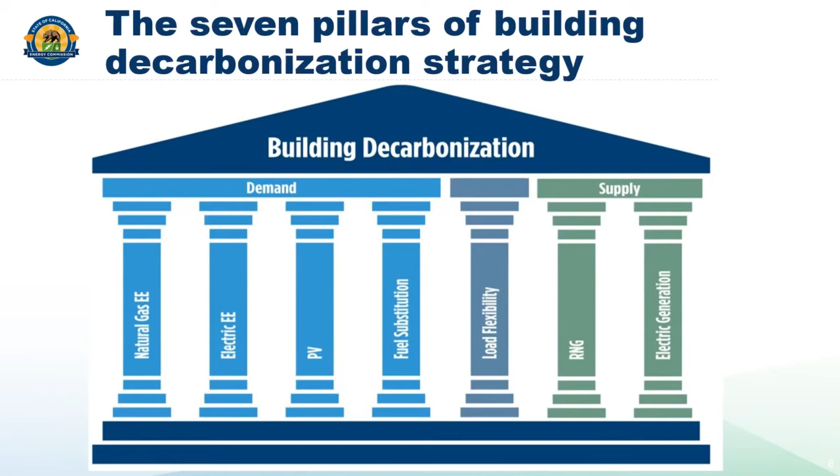Then we have the pillar of load flexibility, which a lot of people will talk about as reducing GHG emissions, and it certainly can. But we actually are starting to think that this might play a much more important role in allowing electrification of a green grid. And these are all things we wouldn't have known without doing the work of the assessment. So you'll see hopefully why we might say some of those things.

So if I'm looking here at this chart, we want to reduce the emissions in 2030, 40% below what they were in 1990. So first we needed to establish what the 1990 GHG emissions actually were. And that's what's done in this left-hand most column. The blue portion of the column are the emissions coming from the electric generation sector. The orange portion are those coming from natural gas combustion. The green block is from HFC leakage.

So HFCs are the predominant refrigerants used, say, in heat pumps. So that ends up being important, especially as we consider fuel substitution in those end uses that would then turn into heat pumps. So we have a small portion added. And then we have natural gas behind the meter leakage in the light blue. And we also include non-natural gas fuel consumption in the yellow, though we're not considering displacing it at this time, at least not in this initial report.

So CARB released the estimates for 2018 values in 2020. That's our second column here. So that gives us a pretty good idea of where we're at right now. And then the third column is our business as usual projection as to where we would be if we don't change any policies. So if we don't make standards a whole lot more aggressive or don't have additional programs that might be focused on decarbonization. So what we can see is that there is about 5.5 million metric tons that we still need to reduce in order to meet the AB 3232 goal.

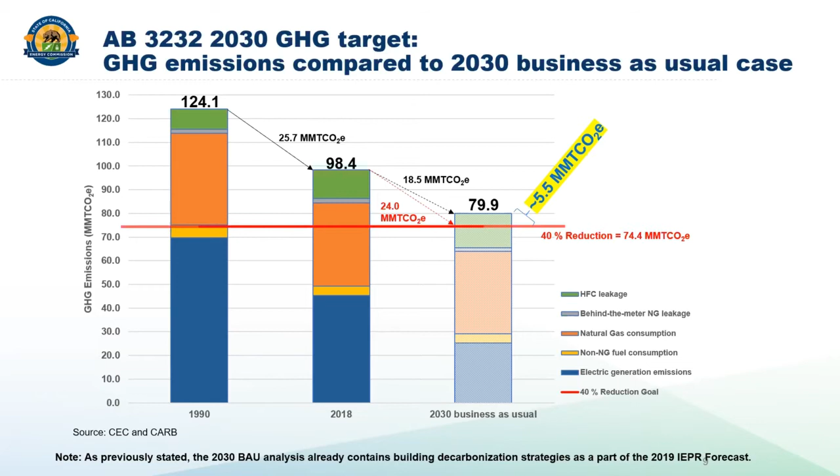All right, so let me summarize the scenarios that we analyzed quantitatively for this. So the first two scenario rows here in pink and purple are the energy efficiency savings scenarios for gas and then for electric. So as I had mentioned before when we talked about SB 350, we have a forecast with various scenarios for additional achievable energy efficiency. And there is this middling forecast which looks at what our business as usual would be. But then we also have more aggressive or optimistic forecasts, where scenario 5 actually meets and slightly exceeds the SB 350 energy efficiency doubling goals.

So what we looked at in these scenarios for decarbonization is how much that incremental added energy efficiency, whether it's gas or electric, how much more GHG reductions we could get from them. We did a similar thing for the yellow row for rooftop PV penetration, because we also have that as a forecast in low penetration, mid penetration, which would be our business as usual, and a high penetration. So we looked at how an incremental addition to rooftop PV penetration would reduce GHG emissions further.

So then on our supply side, we looked at renewable gas penetrations of anywhere from 15 to 20% of pipeline natural gas throughput by 2030. Our business as usual forecast currently does not include RNG, but we did this analysis as far as what if we did include RNG, how much GHG reduction would we get? And since biomethane is estimated to be sufficient to meet up to 15% of pipeline natural gas, that additional 5% to get to 20% would be met by synthetic natural gas, which tends to be much more expensive.

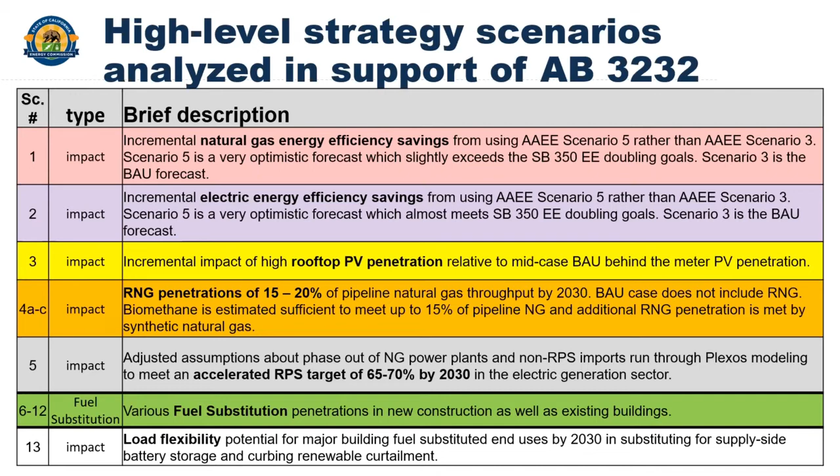So this is a high-level flow chart of our fuel substitution analysis tool. And what we did here is we built a tool that started with our natural gas demand forecast that's reported every 2 years in detail in the IEPR. And we adjusted it by the business as usual energy efficiency savings. And then we disaggregated that from end use down to technologies. And that's using the same technology characterization that the CPUC uses in their potential and goals study.

So once we had everything in the gas forecast broken down to actual gas technologies for the residential and commercial sector, we were able to then select electric technologies to substitute for those gas technologies. We would have at least one, if not several, technologies that we could substitute for each gas technology, and they would provide the same service to the end user.

The output then would be the technology stock left in the final year of 2030, or any interim year if you wanted that. Then, importantly, the costs of those substitution efforts and the incremental electricity added by displacing gas with electricity. And then as far as meeting AB 3232 goals, this is the entire reason we're doing this, we would calculate the net GHG emissions. There also was an hourly module because we needed that in order to assess potential grid impacts, especially of the higher electrification scenarios.

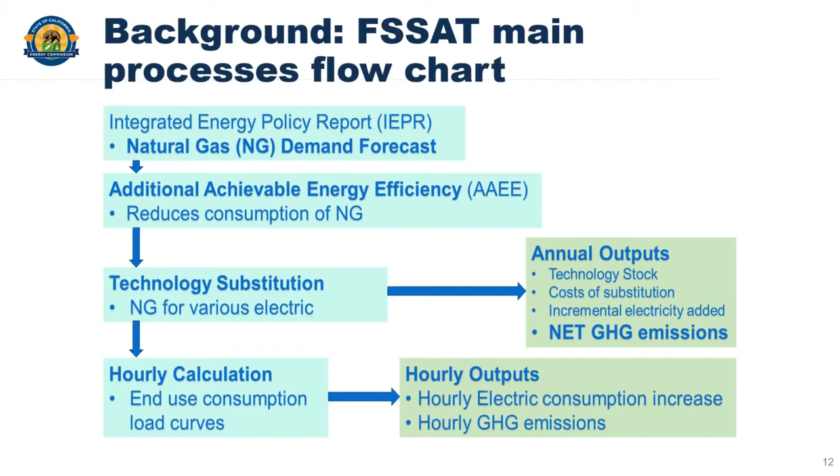All right, so here's a little bit more detail about the 7 scenarios that we are presenting. They all have 100% new construction penetration by 2030. The replace on burnout varied from a low percentage of 15% all the way up to 90%. Replace on burnout means, if my furnace burns out, then I say, okay, I'm not going to put another furnace in, but rather I'm going to put a heat pump in, right?

So that would be a very reasonable way of approaching this with maybe outreach, education, programs could be developed and that sort of thing. Whereas for new construction, having 100% new construction, that's probably more of a rulemaking proceeding.

So then if we look at early replacement, that would be saying, I don't want to burn gas anymore. I want to replace my functioning furnace with a heat pump, right? So that's a little harder to convince people to do because there is a cost there. So we had lower percentages here, going from 5% for most of the scenarios. And we'll see that the lowest scenario, we chose that one because it was the lowest one that met the AB 3232 goals.

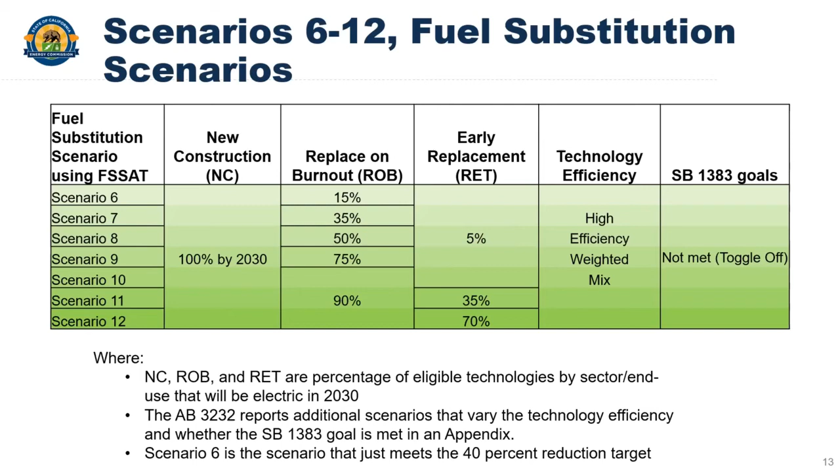So we'll see that here in our GHG impacts. So we're looking at clusters for each of the decarbonization strategies. And this shows the percentage of GHG reduction from 1990 values that we would project from those strategies, in our what if world, our hypothetical, technical potential type world, without any market forces or economics or anything like that, how close can we get to those goals?

And what we see on the left-hand side is energy efficiency savings are unfortunately not quite enough to reach the 40% target. Same for PV; the accelerated RPS, the black column, gets close, right? Fuel substitution or building end-use electrification certainly meets that goal, and for some scenarios can far exceed it. And then the other set of strategies that meets the goal is renewable natural gas.

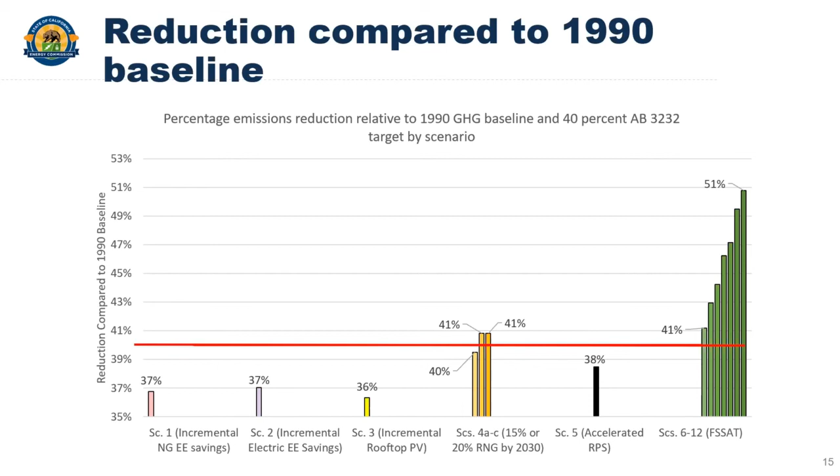So we are actually having overall GHG reductions, which is the intention of this fuel substitution effort in our what if hypothetical world. So you can see that scenario 6 meets the AB 3232 goals. Scenario 12 actually gets down to 50% below 1990.

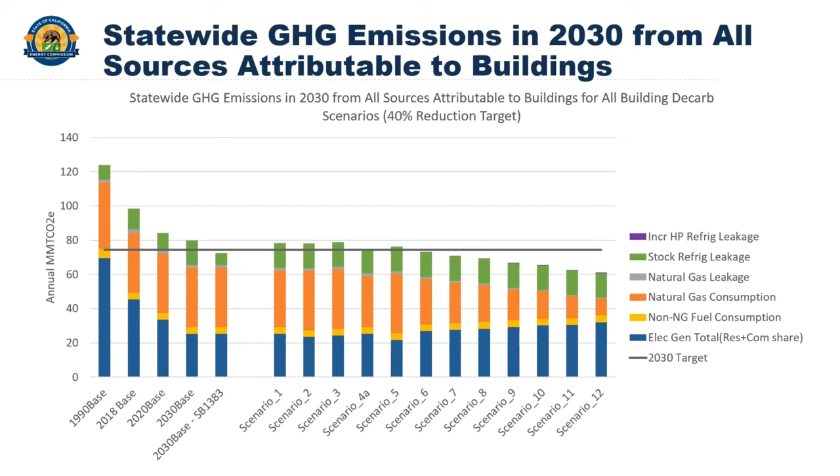Let's move on to costs and cost effectiveness. So we need to do a little bit of shift in thinking, right? All of our physical impacts are occurring from now to 2030. 2030 is our actual goal for AB 3232, and we need to make sure that we meet that target. We want to see what we need to do in order to meet that target. But any efforts that we make in 2029 and 2023, we will still reap benefits from those for the entire time that the technology is installed.

So if I'm going back to my furnace, and my furnace burns out in 2030, I go, okay, this is my opportunity to purchase a heat pump. So I do that, but I incur all of the costs in 2030. But I reap benefits all the way out to 2045, assuming a useful lifetime of 15 years for that heat pump. So if I really want to compare cost per ton of GHG reduction, I might want to consider the impacts and the costs of each of those scenarios based on interventions from 2020 to 2030, but spread them over the entire impact time horizon out to 2045. So that's what we've done here.

So I would encourage you to look only at the right-hand column right now. These are all the same scenarios that we've been presenting. What we can see on the right-hand column is that energy efficiency, unsurprisingly, has a negative cost. So you're also saving money over the lifetime of the equipment by doing energy efficiency. It's very cost effective. That seems reasonable. Same thing for PV: the cost in dollars per ton is negative. So unfortunately, those didn't meet the 40% GHG reduction goal.

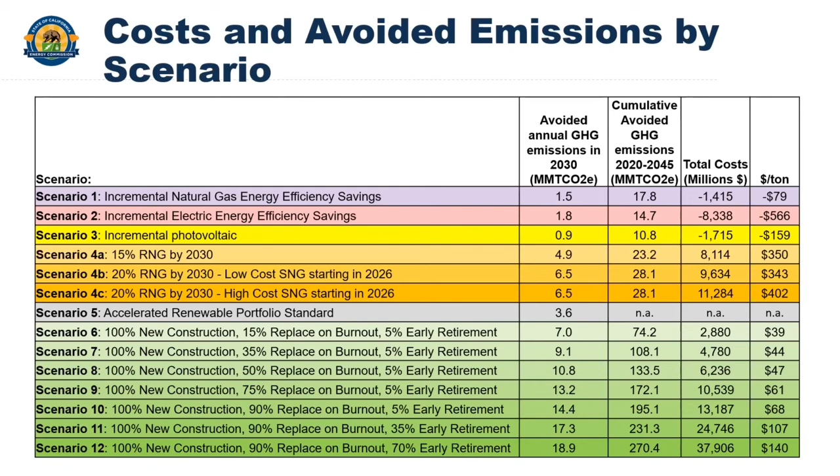But if I look at the orange RNG scenarios, those got close. Now, again, looking at the very right-hand column, they're expensive. It's $343 per ton up to $402 per ton. But if we compare that to our fuel substitution or electrification scenarios in green, those still have positive costs. They're not free. There is a cost for reducing GHGs, but it's much smaller. So we go from $39 per ton up to $140, and the $39 per ton scenario actually meets our AB 3232 goals. So these are all things for policymakers to consider.

Another last item that I want to share with you are some ideas and insights about energy system impacts and grid implications.

So of course, as we're displacing gas, we want to provide the same service to end users. So we are adding incremental electricity. And that's not insignificant, especially as we get to the higher fuel substitution scenarios here on the very right-hand side with scenario 12, so the penultimate column on the right-hand side. So I compared that to the actual baseline consumption in 2030.

So for the residential sector, those columns are higher because the consumption of natural gas is simply much higher, so there's a lot more fuel substitution that can occur there. So for that very high penetration of fuel substitution, in scenario 12, we actually would be adding 40% of the baseline electricity consumption because of fuel substitution in 2030. So we would have to think about how to deal with that demand and provide for it, right?

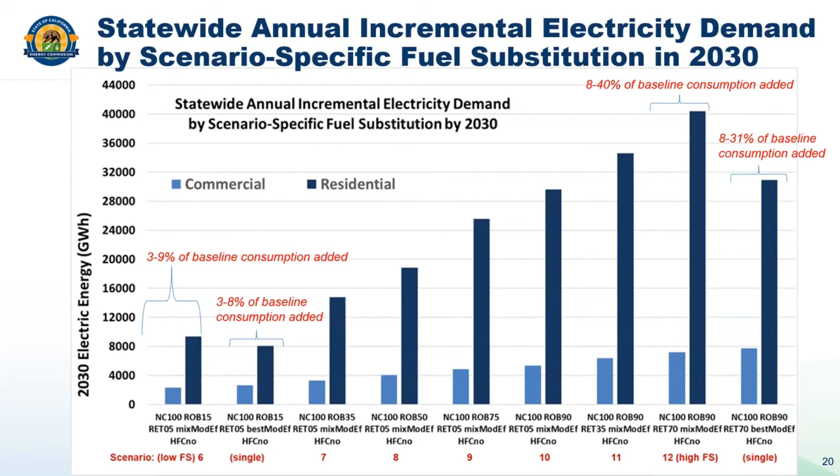So what we also looked at is, well, what if we use the most efficient technologies? Not just skewing it, but only using the most efficient technology. And that was really interesting because that's what provided the most right-hand column. And so for very high penetrations, we were able to reduce the added incremental electricity due to the electrification effort from 40% to 31% of baseline energy consumption there. So that's also something to consider. Really efficient electrification is very, very important.

All right, so last piece here, we need to consider on an hourly basis when we require that added electricity as well. Where is that demand increasing? And we can't see the full impact of added energy system loads resulting from fuel substitution efforts unless we assess when those occur as measured against the baseline loads. So we have seasonal peak loads shown here for Northern California, PG&E being a proxy for Northern California, and SCE and SDG&E being a proxy for Southern California.

And we can see that in 2030, for the very high penetration fuel substitution scenario, the fuel substitution efforts certainly increase peak loads. The increase is the red portion of the column. And the winter loads are actually affected more than summer loads. That would make sense if we're considering space heating, right? That was usually a furnace, but now I have a heat pump. And also, the peak incremental fuel substitution additions are not coincident with managed peak load dates, meaning they don't happen at the same day or time as they would have occurred without electrification. So what?

Ingrid, I just want to let you know that you're at 11:01. Okay, I'm almost there. So close. I got you.

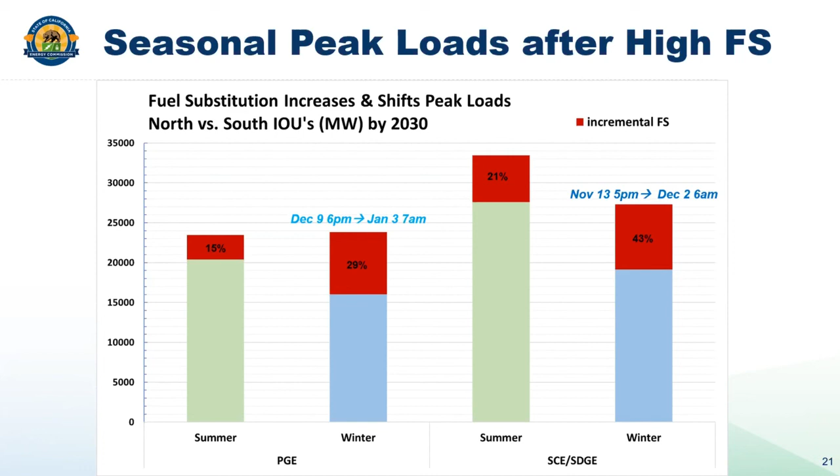Cool. All right. So basically, we're not really worried about the day necessarily changing, right? That's something that could be accommodated for. But what's very interesting to see, and I've noted here, is that the times are changing. The peak loads are actually being shifted from early evening hours to morning hours. That's again indicative of added electrified space heating during the winter. The summer peak loads are not shifted in the same way.

All right, so this was the last slide I promised, for load flexibility. We defined load flexibility as load shift using the CPUC's definition for this analysis. We constrained load shifting to be 20% of end-use demand, and we only used additional load shift potential of fuel substitution for the newly electrified end uses, so that would be HVAC and water heating. We didn't include appliances. We didn't think that was something that could be automatically shifted. There's too much of a behavioral component there.

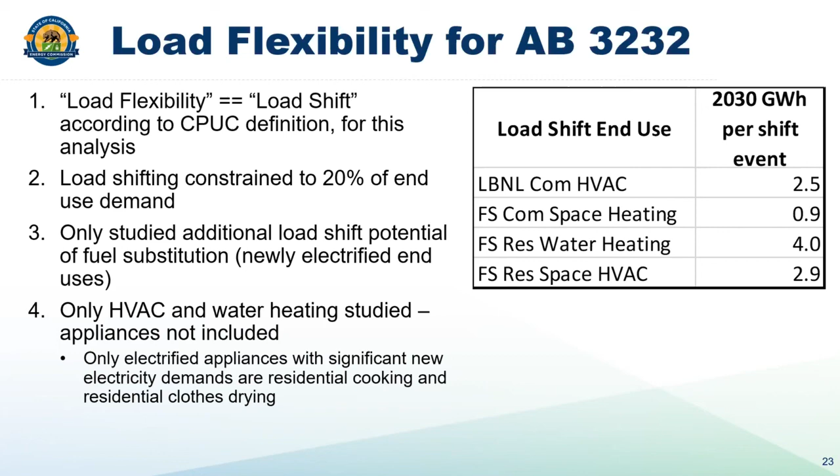So we did a very conservative estimate that was consistent with LBNL's demand response potential study that was released in the summer of 2020 and the pathway study completed by E3. And what we found were these gigawatt hours per shift event, and we did find a nominal amount of GHG reduction, but are starting to think that the true value of load shift really lies in mitigating adding more battery storage as we electrify, and also reducing generation curtailment.

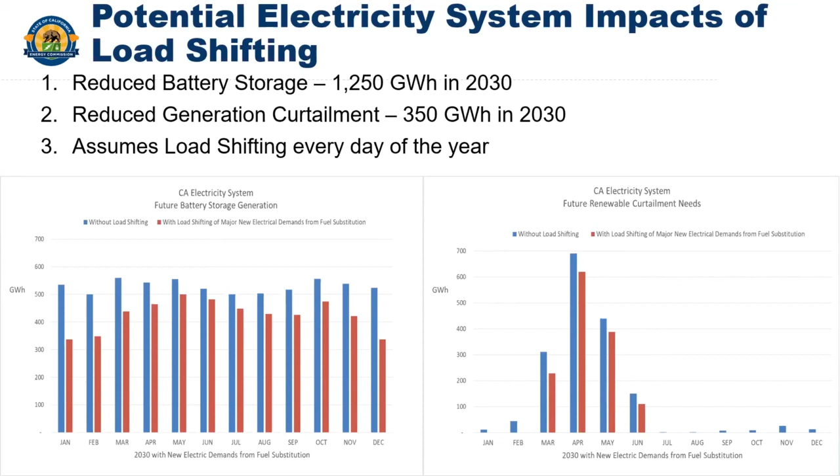So the efficiency division is also working on the 2020 load management rulemaking, so I've included that link. The goal of that proceeding is to form the foundation for a statewide system that automates the creation of hourly and sub-hourly costs or signals that can be used by end-use automation to provide real-time demand flexibility on the grid. They are working very closely with the folks in the appliance office on SB 49. And all these efforts will very much support any future electrification of a green grid. So I'm done.

Well done, Ingrid. Okay, that is a very optimistic and interesting presentation.